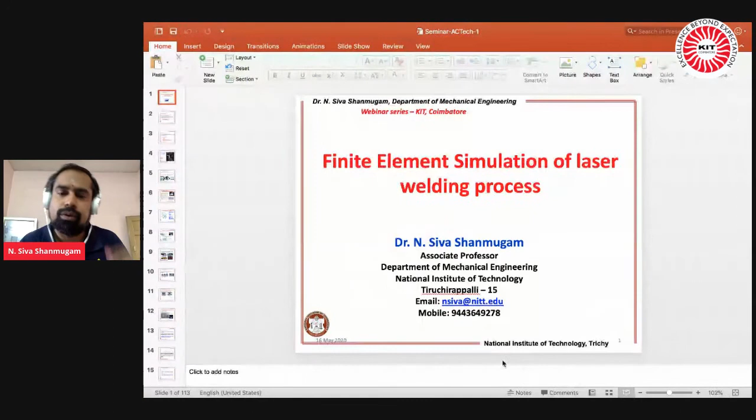So my today's topic is on finite element simulation of laser welding process. The finite element method is a numerical tool or numerical technique where you can apply this technique to any field. It is not only for welding; you can use this finite element tool for any manufacturing process or any physical problem.

So the idea behind that is, if you want to understand a problem and do a number of trials, since experimental methods are very costly, in order to reduce the experimental work and get more insight about the problem, the only way is to simulate the problem and understand the phenomenon. Understanding the phenomenon means you have to know something about the problem by searching in books or in open sources.

Once you understand the problem and the behavior of the system, you can use numerical techniques like the finite element method, finite difference method, finite volume method, or boundary element method. You can adapt these numerical techniques to simulate the problem.

Why, sir? What is the need of simulation, sir? When you want to launch a vehicle, for example if you are working on aerospace and want to launch a rocket, doing all the experimental work, fabrications, and then the launch—if something happens to the system, the entire mission collapses. To avoid that, they go for numerous trials, doing simulation using CFD packages or finite element packages, and find out whether the developed model is working under the correct conditions. Once you understand that, then you can go for an experimental methodology.

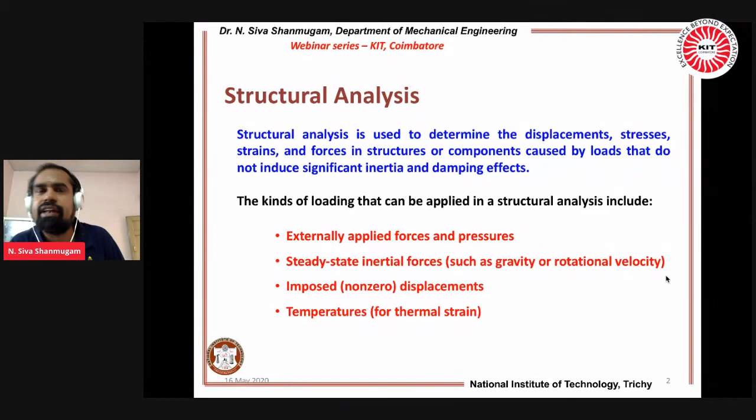Sir, I want to impose the temperature—it is not at room temperature, it is at an elevated condition. Then instead of 30 degrees centigrade or 35 degrees centigrade, you have to impose the temperature prevailing in that condition. For example, if I am working in cryogenic conditions, then it is about minus 250 degrees centigrade or minus 50 degrees centigrade, related to the structural part.

So these are all the 4 different loads where most of the structural analyzers are utilizing for that problem.

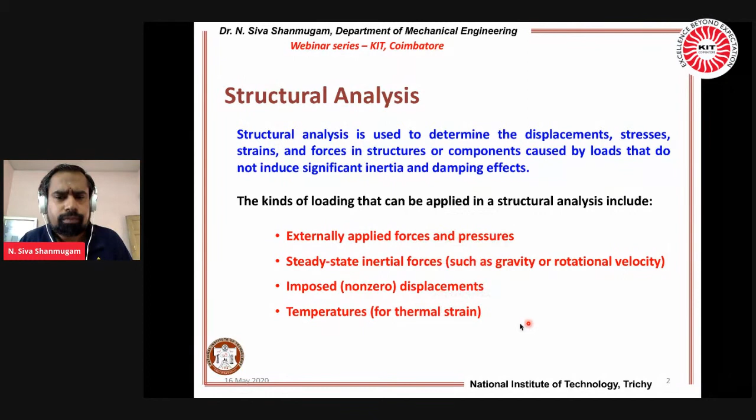Okay, so now we are going to the next part—the thermal analysis, because it depends upon the problem that you are going to simulate. Sir, in FEA, when you go for thermal analysis, the finite element analysis is capable of both steady state and transient analysis. It may be a time-dependent problem, or it may be independent of time.

Transient analysis of any solid with thermal boundary conditions—because I am going to heat the body, and there are boundary conditions where the heat is propagating inside the material by means of conduction. There is heat transfer, convective heat transfer, or it may lead to a radiation effect. These are all things you have to incorporate into your model, both in steady state or transient, according to the problem you have selected for your research.

That's why I repeat once again, before doing the simulation, my dear friends, please understand the physics of the problem.

Steady state thermal analysis calculates the effect of steady thermal loads on a system or a component. So you can take it as an entire system, or you take only a part of the system and do the analysis. Such loads include the following.

It may be convective heat transfer, convection, radiation, or it may be heat flow, or it may be heat flux. You know, heat flux is heat flow per unit area—it is in joules, or it may be in terms of watt per mm square or watt per meter square. Heat flux pertains only to the surface area.

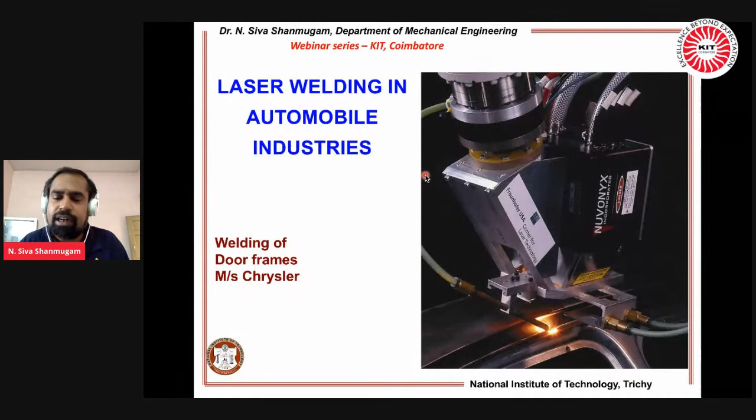Shielding gases: there is a variety of shielding gases used in welding processes, especially for laser welding. We utilize helium or argon, or a combination of helium plus argon. These are called inert gases, of 100% purity - industrial pure argon or industrial pure helium.

Helium gas is quite expensive, so for most of our welding trials we have utilized argon because it is less expensive compared to helium. A combination of 50% helium and 50% argon can also be utilized to optimize the output parameters.

What is the output parameter? Once after completing the welding, if you cut the weld and do the metallography examination like polishing and etching, you can see the weld bead geometry. Weld bead geometry is the output parameter, the desirable quality which will judge the quality of the weld. That's why I used the word 'required weld profile'.

Weld profile means weld bead geometry. Let me draw that weld bead geometry. A small example using a pen: for instance, this is a plate with a square butt joint. This is the joint, so if you want to see the weld geometry, this is that weld.

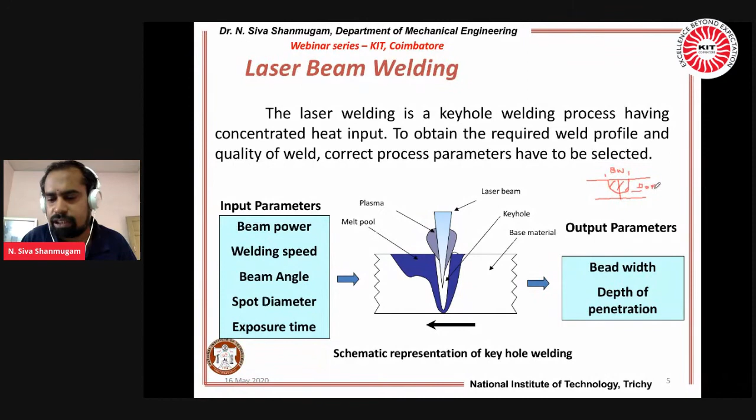So these are all the things I have discussed for the last 15 to 20 minutes. Now another thing - because each and every slide will give a different research area, my dear friends, please be focused on my presentation.

So what do you mean by the Tailor welded blank? This is very, very popular nowadays in all manufacturing sectors. Why is it called Tailor welded blank? What is the duty of a tailor? He is going to join 2 different colored cloths with the help of a sewing machine.

See, it is tailor made. What is your need? What is your need? You can do it - sir, I want to join Inconel with stainless steel. Do it, that is a possibility. That is called Tailor welded blanks.

According to our use, you are joining 2 dissimilar materials - that is also called Tailor welded blank. Or 2 dissimilar thicknesses. Sir, if you take a car, if you take the monocoque of the entire car, it is not having a uniform thickness. See, I am joining a 3 mm thick sheet with a 1.5 mm thick sheet.

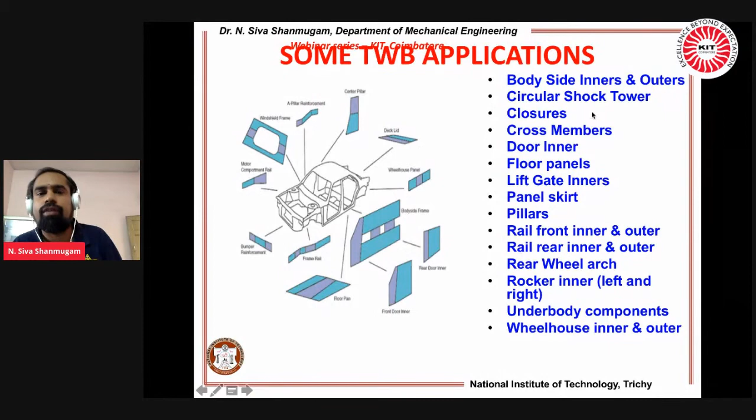So everything is listed here — what are the areas where they go for tailor welded blanks? These are all common day-to-day applications. They mostly use tailor welding, that is, laser hybrid welding.

So far what I covered is tailor welded blanks. Now I am going to introduce the hybrid process. What do you mean by hybrid? You are adding two technologies under one umbrella to get the advantages of both processes. What do you mean by laser hybrid? I am going to connect

the GMAW process with laser. What do you mean by GMAW? As a mechanical engineer, in your first semester you would have studied basic mechanical engineering, where you learned about gas metal arc welding. It is also called MIG — metal inert gas welding. They use a consumable filler wire to deposit it on the substrate material, on the joint where needed.

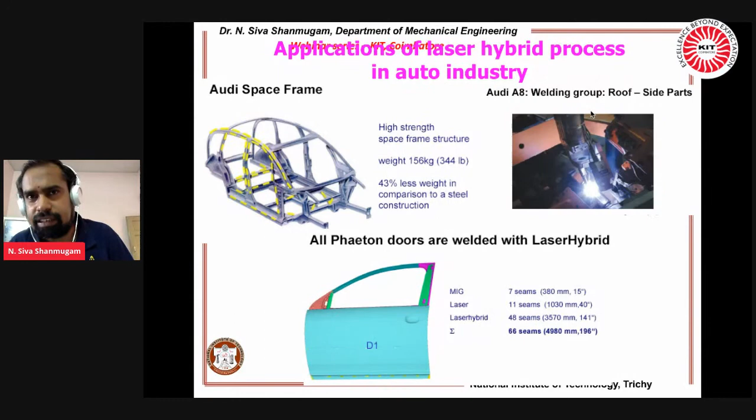Sir, what is the advantage of GMAW? What is the advantage of the laser? Why are you adding the laser in the hybrid process?

So many things are there. Without laser, it is inevitable to develop a monocoque structure of any car frames. So this is the typical picture which will give an insight related to laser hybrid welding. Before getting into the schematic, I want to share very important information pertaining to laser.

The parameters related to the laser: beam power is the energy, and welding speed is how fast you are moving the welding head, that is the laser head.

Now, about the spot diameter, because we are playing with light energy. When you are doing a classroom lecture or a PowerPoint presentation, you use a laser pointer. Here itself I'll show, there is a laser pointer here.

If you take a laser pointer, this red color available in my presentation is the laser pointer. You see the size of the pointer is something around 2 mm, or 3 mm. I think everyone can understand. As I move the laser pointer in my PPT, the approximate diameter of the red color you are seeing is about 3 mm, or it may be 4 mm.

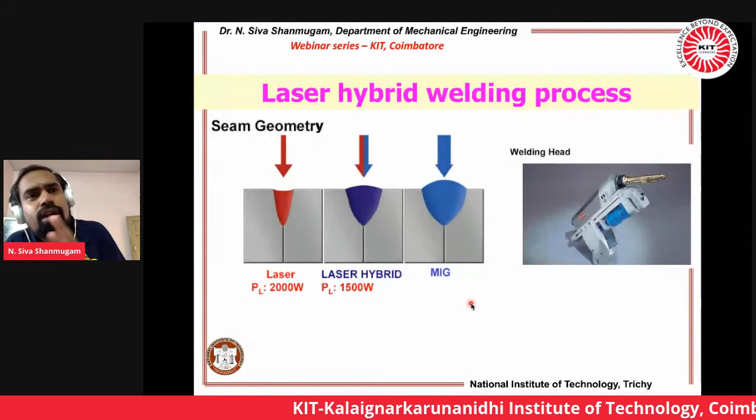Sir, what about when you compare the energy you are acquiring from the laser with the conventional arc? Oh, very good question, I want to answer that. How do we compare it with conventional arc welding? What do you mean by conventional? This MIG that I showcased here, MIG welding.

What is MIG welding? It is metal inert gas welding. What do you mean by metal inert gas? You are using a consumable filler wire. What is the diameter of the filler wire? Sir, my filler wire diameter is 1.6 mm.

So how do we get the arc out? When you touch the filler wire - or otherwise, leave the MIG and go with normal stick welding. On the roadside you can see a torch with the electrode; the electrode diameter is something around 10 mm. For example, take the diameter of the electrode in roadside welding, where they do some joints.

When you want to create grills, if you go to a grill shop, the welder will take stick welding in hand. They do that welding for making grills, door panels, sheds, etc. The welder carries this handheld electrode machine, the stick welding machine, to create those panels. The electrode they place is around 10 mm, and the arc established is at a diameter of 10 mm.

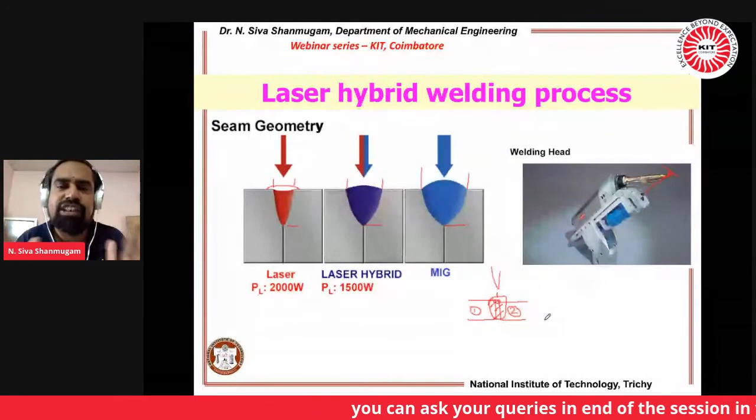So this is the beauty of it. You see, with the laser, even though the gap is very high, something around 1 mm, with the help of the laser hybrid technique the parameter is indicated here. Welding speed is maintained at around 2.4 meters per minute—for 60 seconds, it moved around 2400 mm. With the same welding speed, using only the laser, you are not getting the gap bridgeability.

You see, there is a lack of fusion, and this imperfection is called undercut. Undercut leads to, when you are applying a load over here, you get the fracture at this location. Undercut leads to weld imperfection. Clear?

So with these two things, I think I have enriched your knowledge in laser hybrid as well as the laser beam welding process.

This is another typical example. Whatever may be the joint configuration—it could be like a fillet, an L joint, a T joint, or a lap fillet. I repeat, joint configurations like lap seam, lap fillet, T-joint, square butt joint. What I have drawn in the presentation is a square butt joint. We can do lap seam, lap fillet, T-joint, and whatever may be the position, you can keep that. You can orient the laser head and do the joint configurations. You can do overhead positions, 2G position, or 1G position—whatever may be the position, you can tune the laser according to your vision.

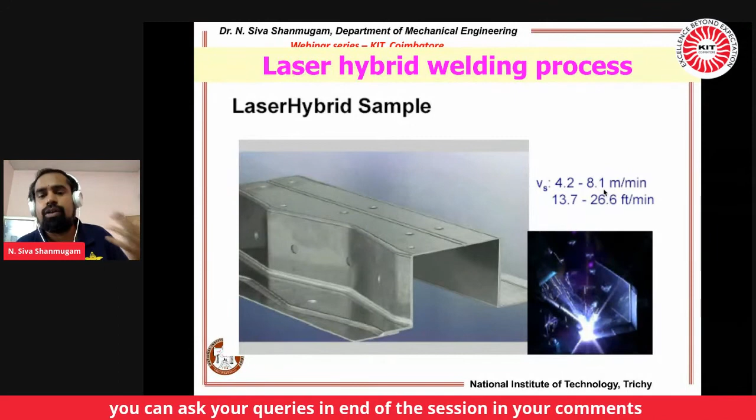This is about a welding speed of around 8.1—it is a very high speed, my dear friends. It is something around 8,000 mm per minute. In 60 seconds, you can move with a very high speed of 8,000 mm.

Okay sir, why do modeling? So far I have discussed with you the purpose of modeling. Modeling is the art of abstracting or representing a phenomena. That's why I asked you first: understand the phenomena before doing the modeling.

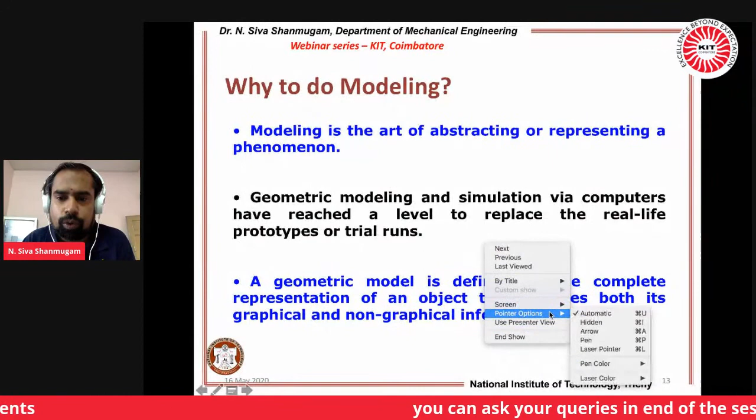Geometric modeling and simulation via computers—once again, I'll change it to laser pointer. With simulation via computers, I have reached a level to replace the real-life prototypes or trial runs. You can minimize the trial runs and simulate the system with the help of computers. A geometric model is defined as the complete representation of an object that includes both its graphical and non-graphical information. So you can plot something or unplot something and do the simulation.

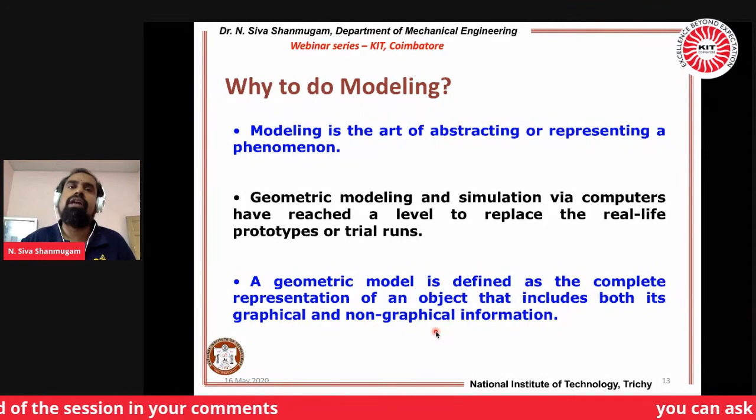So the only thing is you have to model the phenomena. For that you have to understand the phenomena, then do the geometric model, then simulate using the computers. Okay sir, then is modeling alone sufficient? Sir, how to cross-check, how to verify the model is correct or not? Then you have to do the actual experimental trials.

My dear friends, at this juncture I want to insist on a very important thing. When you are writing a research article, when you are doing the simulation, please don't report only the simulation part—you have to validate your results. Validation means you can validate the simulation results in three forms. First, you can validate the results analytically. Analytically means, if you have governing differential equations, you can apply the boundary conditions and find out the unknown parameter.

What is the unknown parameter here in case of welding? It is the bead width and depth of penetration. From the heat profile, from the temperature distribution profile, you can predict the approximate bead width and depth of penetration using analytical solutions—analytically you can play with the equation. Second, if you are not getting any analytical equation, then do the experimental work: do the actual experiment, do the laser welding, cut the specimen, metallographically prepare the specimen, etch it, polish it, and reveal the macro structure to get the bead width as well as the depth of penetration.

Or the third one, sir, analytically not possible, experimentally not possible. Then you have another technique, another method is to compare with previously published research articles. Don't take a normal paper, take an SCI indexed or Web of Science article, then compare your results with that published article. It is very, very important, friends.

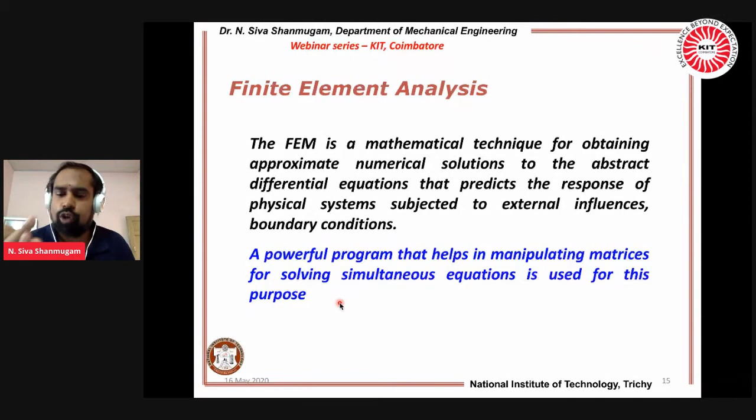When you go for this, sir, whatever package it may be, this is the step you are going to follow. Whatever the package - ANSYS, COMSOL, Abaqus, Nastran, Patran, NISA - whatever it may be, this is the procedure. The first 5 steps are called pre-processing. The 6th step is called the solution phase, and the 7th step is called post-processing.

First 5 steps are called pre-processing. If we go to the ANSYS window, you can see on the left-hand side pre-processing, solution, and post-processing. The first 5 steps are pre-processing, the 6th step is the solution phase, and the 7th step is post-processing.

What is pre-processing? You are assigning the element - what type of element you have to select to do the analysis - and how you are applying the material properties, everything happens in the pre-processor. Applying the loading conditions, boundary conditions, everything is related to the pre-processor.

What do you mean by the solution phase? You are going to solve the current load step - that comes under the solution phase. What is the 7th step?

You are reviewing the results. Sir, I want to find out the temperature distribution, the von Mises stress distribution, the principal stresses, and the displacement or deformation, etc.

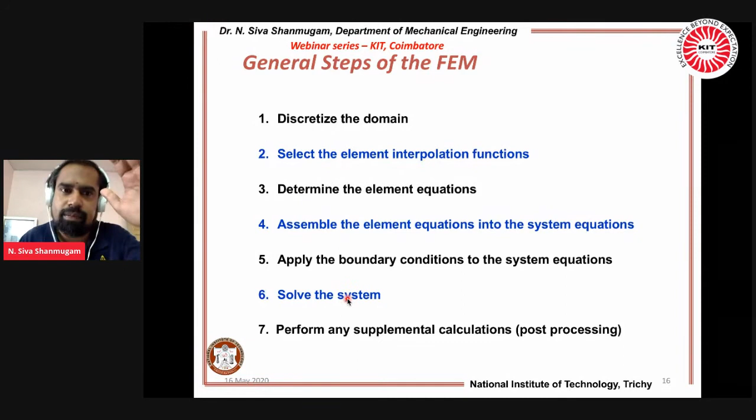That is coming under the post-processing. This is something about the general steps followed in the finite element method.

Okay sir, why FEM for this welding problem? So this slide gives basic information on why we are applying the finite element method, or a numerical simulation tool, to simulate the laser welding process or a welding process.

Heat developed during the welding process occurs because the light energy coming out from the laser head impinges on the substrate. That energy, the light energy, is converted into heat energy.

The heat developed during the welding process intermittently interacts with the workpiece over a very short time interval. You can see 8,000 mm per minute. If you want to do a weld of around 1 meter, the welding speed followed is something around 8 meters per minute. So within a fraction of seconds you are crossing the 1 meter length. In each time interval, one end part is heating while behind it the part is cooling - heating, cooling, heating, cooling.

So if you want to really simulate the conditions and understand the basic physics behind the welding, then simulation is very, very important to understand what temperature is prevailing before the heat source and behind the heat source. I will show this when I am showcasing the results.

So going to the experimental part, I want to thank, at this juncture, the Welding Research Institute for providing me the experimental facility to conduct so many experimental trials at the laser welding facility.

This is the power source available at the Welding Research Institute. It is a 2 kilowatt Nd:YAG laser, a solid state laser - neodymium yttrium aluminum garnet laser welding system. There are 4 compartments, and each compartment is capable of producing 500 watts. This is the laser head.

As I already discussed with you, you can tilt the laser head to attain a different beam inclination. That is another very important piece of information which I will explain.

This is the entire computer numerical control setup. Because it is a radiation, it will create harmful effects to your eye, that's why the entire system is closed and the beam is invisible. You can only see the heat, the back reflection on the monitor - that small fire you can see is only the fusion area. And this is the cross wire, which is used for aligning the laser on the substrate.

Sir, for example, if I want to do a circular weld, this cross wire will be properly aligned on the circular section. This cross wire indicates that the laser is following the correct path, similar to what you maintain in a gun when you want to shoot something—there is a cross wire, same method we follow here. You also see a shielding arrangement, a cross jet of gas. This cross jet of air is used for cleaning the incoming laser, because it is only light energy where you have dust particles.

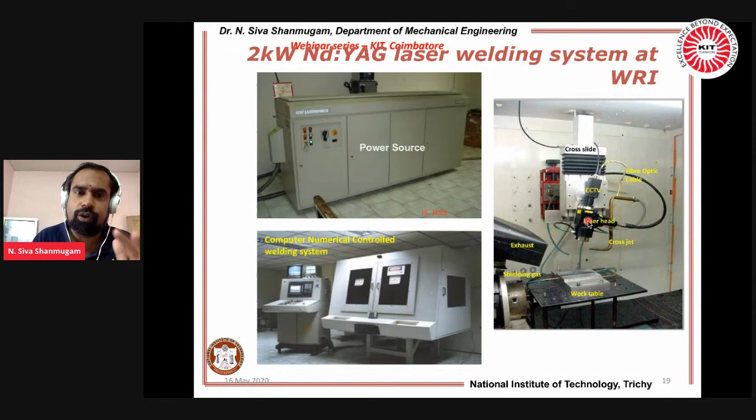So this is the arrangement available at the Welding Research Institute for doing the experimental trials, and this is the beauty of it. When you are playing with light energy, you have to ensure that all the energy is distributed in the circle, in the spot diameter. Correct, sir? So as already discussed, whatever beam power you set in the system should be properly focused in the spot diameter.

You see there is a small graph. What it indicates is like a Gaussian profile. This means the entire energy is distributed inside the spot diameter like a Gaussian distribution. It is called TEM00 mode, transverse electromagnetic mode. It is nothing but the intensity distribution measured over the beam cross section. I repeat, TEM00 mode—what do you mean by TEM00 now?

The entire energy is focused inside the spot diameter. What do you mean by transverse electromagnetic mode? It is judged, it is measured in such a way that shows how the heat intensity is distributed over the beam cross section. When the beam comes out from the laser, if you cut the beam, you can see how the heat is distributed—that gives an idea of TEM00. Sir, do we have any other TEM?

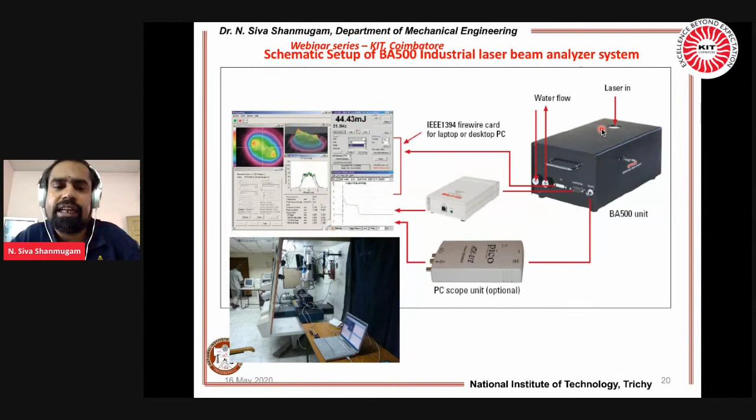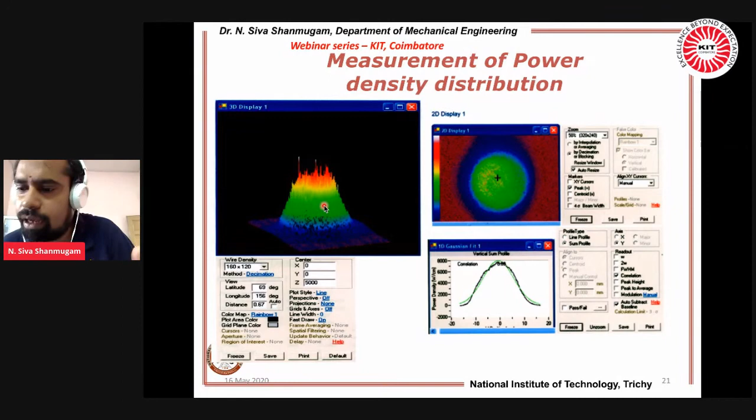Okay sir, this is the way the heat is distributed. So now the laser is ready for doing the trials. This is before doing the welding—you have to tune the laser in such a way that we are obtaining TEM00 mode to ensure we are doing the experiment correctly, using that beam density information.

It is something around less than 0.1%.

When you go for a laser beam welding simulation, so far you have understood laser beam welding, laser hybrid welding, why finite element method, what are the input parameters, what is the output, what is the desirability level - everything we have discussed. When you go for doing the simulation, it is a computer program. I am using ANSYS Parametric Design Language, APDL. Please make a note of it. APDL is utilized for simulating the entire process of the welding.

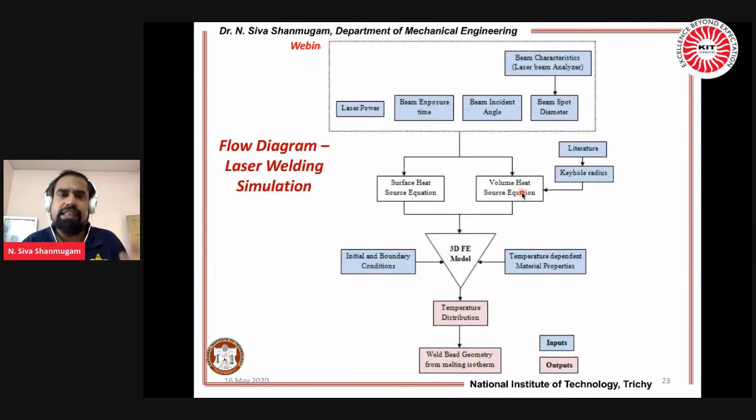So this is the sequence I have followed. The same thing is shown in flowchart form, where I use temperature dependent properties like conductivity, density, enthalpy. Why enthalpy? Because I am considering the phase transformation - solid converting to liquid. Upon transformation and upon solidification, you are getting liquid from solid, and solid from liquid.

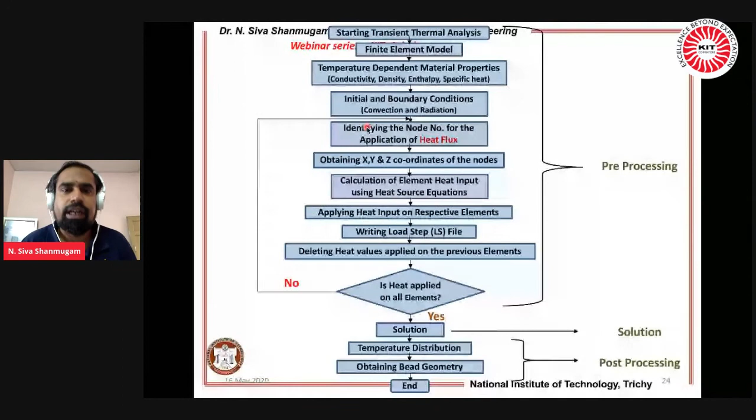So with initial boundary conditions, applying the heat flux, giving the heat source equations, applying the load step, you develop and solve the problem, and find out the temperature distribution. This is a normal mathematical description of the problem - it is the heat conduction equation.

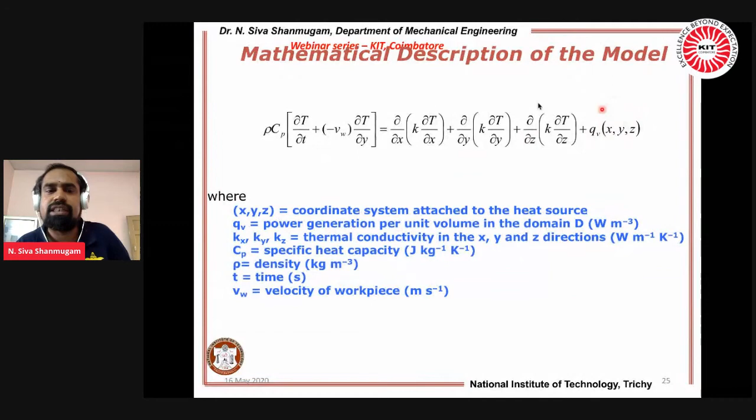qv represents the heat source model. What I consider for this is the power generation per unit volume. So the power I am going to give is specified in terms of these equations, and it translates into heat energy on the substrate material.

I have discussed so many things. What are the different heat source models available? Apart from the three I mentioned, there are so many heat source models available - modified Gaussians are available. In plasma arc welding, they use different sources. So based on the weld bead geometry, the physics of the welding, and the resulting bead, researchers write their own volumetric heat source.

But for my problem, we have utilized only the three-dimensional conical heat source. This is a schematic representation of the conical Gaussian heat source, which I'll show in the forthcoming slide. This is the predominant one, called the Goldak heat source model. This is called double ellipsoidal. For conventional arc welding like MIG, TIG, stick welding, they use this double ellipsoidal heat source for doing the simulation. What do I mean by Gaussian, which I already discussed?

I have used the industrial beam analyzer to get the Gaussian distribution - how the heat is distributed on the top surface. So the conical Gaussian is the addition of Gaussian at the top and conical at the bottom. This is the beautiful representation of a conical Gaussian - the top is the Gaussian representation. For example, if you take a sheet metal, on the top surface, when the laser is impinging and touches the surface, the distribution of heat on the top surface is Gaussian.

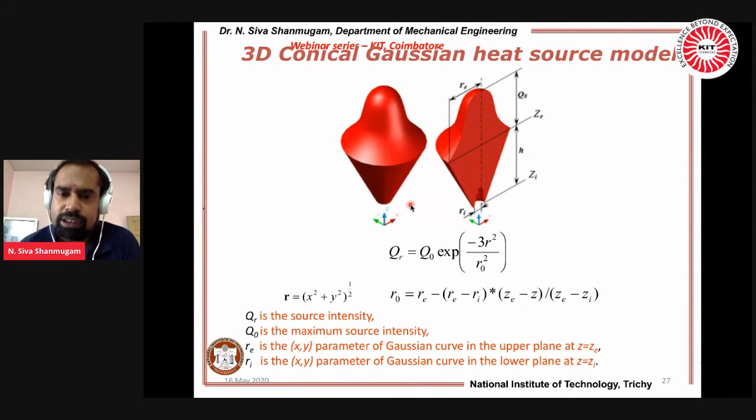I repeat once again, this 3D conical Gaussian comprises two parts. It is divided into two: the first is the surface, the second is the volume. It is a surface because it is taken only along the x and y axes.

At Z equals 0, this is the top surface. Z equals minus h is the bottom. If we take h as the thickness of the material, Z equals 0 at the top surface, and Z equals H at the bottom portion of the material. So we have two surfaces when you take a sheet metal, the top and the bottom surface. Top surface we consider Z equals 0 and bottom surface Z equals H, where H is the thickness of the material.

With these equations, I am feeding this equation into my finite element code in order to simulate the volumetric heat source. What do you mean by the volumetric heat source? What is the behavior of laser welding, and how are we getting that behavior? Once I get the weld bead geometry, based on the shape of the weld bead geometry, I select the heat source. Sir, if it is for conventional arc welding with shallow penetration, then the 3D conical Gaussian heat source is not required.

In that case, you go for the Goldak double ellipsoidal heat source. Sir, when you go for friction welding, these heat sources are not possible to use for simulation. You can go for frictional heat instead. From the frictional heat you have to do the simulation for analyzing friction welding processes. So this is something about the surface heat source and something about the volumetric one, with each terminology given here.

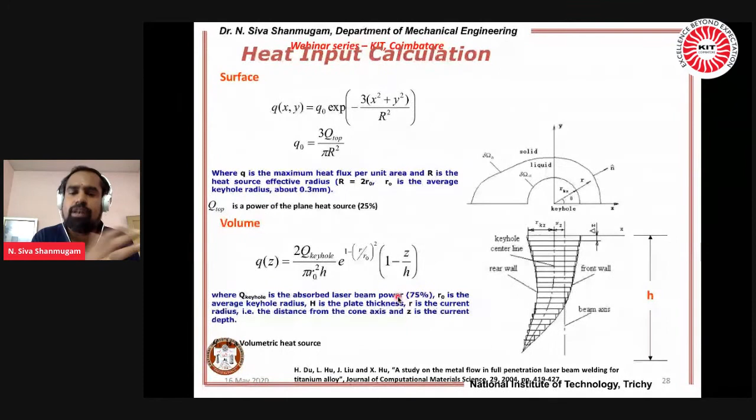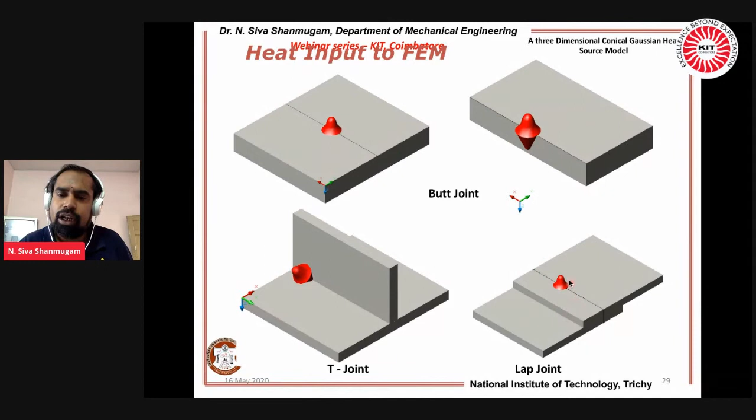This is the way I want to tilt the laser beam and impinge it on the weld trajectory. When you go for a lap joint, it is called lap seam, similar to the butt joint. You are impinging the laser on the substrate above the sheet. If you place one sheet over the other, it is called a lap joint, and you impinge the laser on the top surface of the top sheet.

So now, based on the boundary conditions, what are the boundary conditions? It is an entry. The initial conditions are at time t equal to 0. At time t equal to 0, temperature should be at room conditions, where T0 is the room temperature.

So during the entry, it is at the initial condition. The entire substrate material should be at room temperature, where T0 implies the room temperature.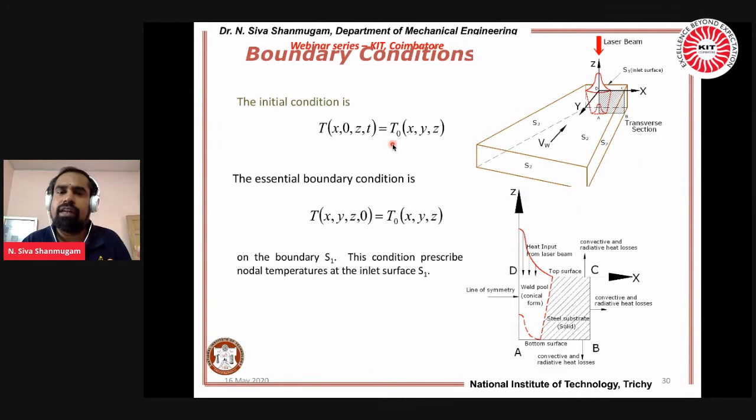Okay, so what about the natural boundary conditions? Because I am talking about laser irradiation, and radiation means energy will be dissipated. Laser irradiation means it's absorbed. Laser radiation means energy is wasted in terms of radiative heat transfer, but laser irradiation means it is absorbed by the substrate material. So according to the natural boundary conditions, I have considered three modes of heat transfer: conduction, convection, and radiation effect.

Okay, so this is the thing. When I discussed the beam incident angle, this is the point I want to highlight here. If you keep the laser head straight, because we are playing with the optics, we are orienting the laser by changing the optics, since it is only a movement of light energy. By fiber optic cable, you are transporting the laser from one portion to another point, and with the help of the optics, you are impinging the laser to the spot diameter of the beam.

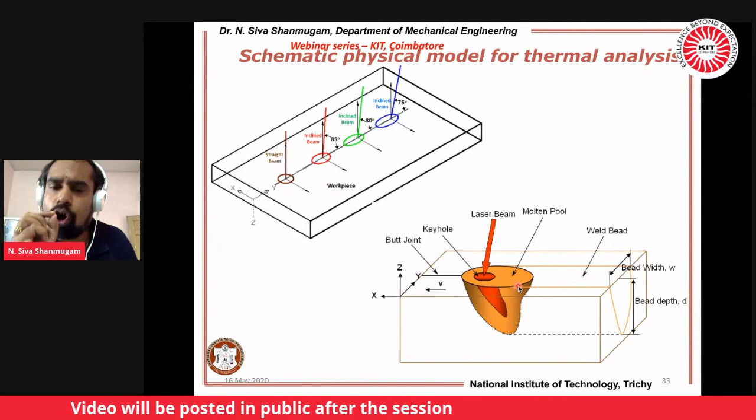So your keyhole will not be visible to your eye. But during the simulation, during the condition of welding, you can see the keyhole using a high-speed camera. The cut section is not possible, but when you focus on the top surface, you can see a very small pinhole, which I'll show when I present the real picture of the weld.

This is the finite element model. As far as the condition for the finite element model is concerned, wherever your concentration is very high, wherever you are doing the simulations, you can see the temperature distribution here. The temperature gradient is very high at the weld trajectory. As you move further, the temperature gradient is not as high. So that area gets a coarse mesh, while the weld trajectory is meshed with fine elements - fine mesh at the weld trajectory, coarse mesh far from it. The total nodes and elements are depicted in this picture.

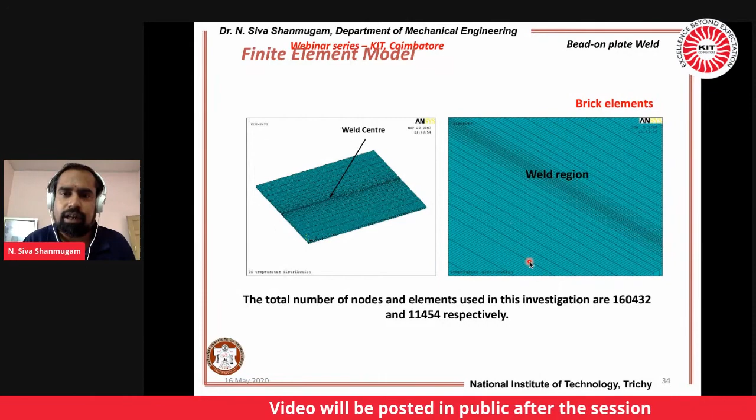So what about the assumptions? Without assumptions, it is not possible to do the simulation. I am doing only the thermal part, not the fluid flow part, because fluid flow requires considering the convective flow, Marangoni convection. Please write down the term Marangoni convection.

It is called the Marangoni effect, sir. It is a beautiful thing. Because I am running out of time, I already crossed my given time, so there is so much information I could give about the Marangoni effect, sir.

When you do simulation in CFD, you have to consider all those effects, but I am doing only the thermal analysis. In thermal analysis, there is no need to consider physical phenomena like viscous force, buoyancy force, convective melt flow, Marangoni effects, etc. By considering this, I already discussed that the absorptivity of the material is only 69.3%.

As proposed by Xie and Kar in 1999, the laser absorptivity for stainless steel is only 69.3%. So if you are operating with 1000 watt beam power, only 69.3% of that 1000 watts will get into the material, not 100%.

The lumped heat transfer coefficient I considered for this analysis was proposed by Frewin and Scott - you have to acknowledge and cite references when using something in a research article. Convection and radiation loads are considered. By considering the phase change, I derived the enthalpy of the material, and conductivity, specific heat, density are all temperature-dependent properties.

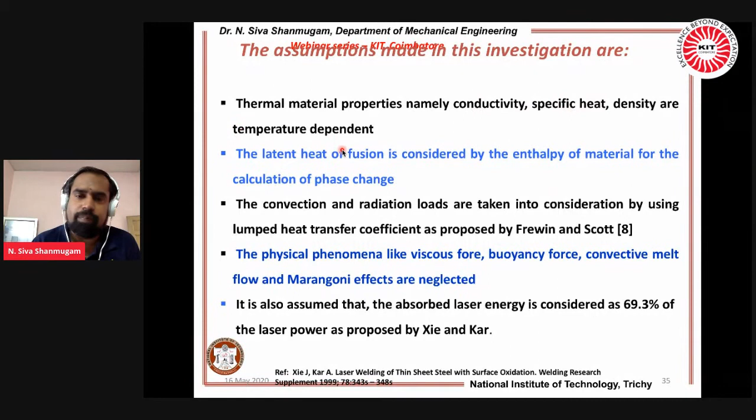So with the laser spot diameter, there is no movement of the laser now - the laser head is kept stationary. I am going to do only the spot welding.

Why am I going for spot welding? First, I want to understand the behavior of the spot welding, then go with the laser seam welding.

Laser seam welding means moving the laser torch, given a welding speed. You start with the welding speed. It will move with very high speed, 800 mm per minute or 8000, whatever the capability of the machine allows you to move the torch.

So what are the parameters? What are the input parameters? Now I can do the optimization to find out for which parameter set I am getting a very high depth of penetration, by doing the combinations and all.

You see, with different spot diameters, you can see the hole, the pinhole at the top surface. This is because of the keyhole. After removal of the heat source, the molten pool will close the entire keyhole but leave the impression at the top surface - that is why it's called the keyhole technique.

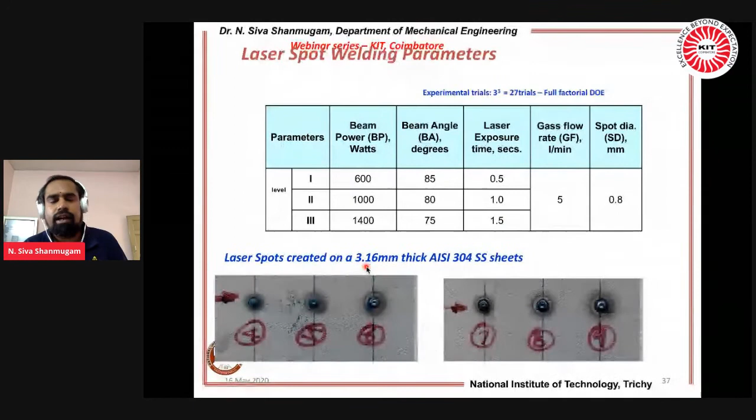This is exposed with different exposure times: 0.5 seconds, 1 second, 1.5 seconds. These are all made on SS304 material, with thickness of 3.16 mm. With 27 trials total, you can understand the phenomenon behind laser welding.

I already told you, if it is a straight beam, you get a circle, almost. But we operated around an 85-degree beam angle, so you're not getting a circle, only an elliptical profile. For a wider beam angle, you don't get a circle, it's almost elliptical.

So it's fully elliptical. For very high exposure time and very high beam power of 1400 watts, and beam angle of 75 degrees, you get a very high elliptical shape on the top surface. Like that, it is on the top surface.

You can do the simulation for creating a spot. The first spot is opened at an exposure of 0.5 second, and you move the torch to another location for creating another spot. I repeat, one spot is created at an exposure time of 0.5 second. The laser head is moved to another location because you want to continuously create spots as shown in the picture: spot number 1, spot number 2, spot number 3.

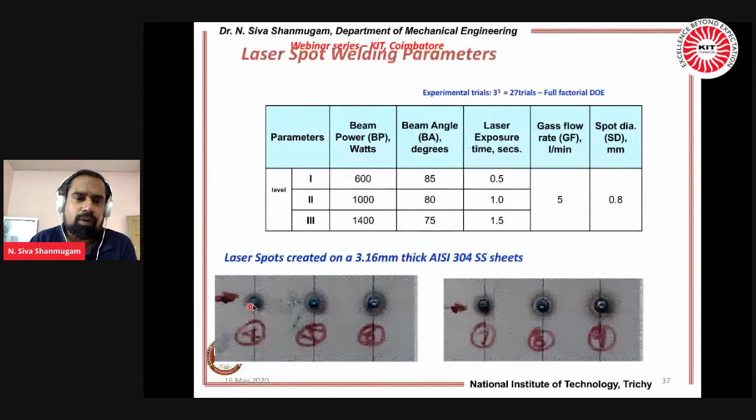You can really simulate the situation using ANSYS APDL, that is ANSYS Parametric Design Language. If you want more information, go to YouTube and type ANSYS Parametric Design Language welding simulation. You can acquire more information on APDL.

See, this is the scenario: one spot is created, the laser is moved to another location, another spot is created. One spot is in solidification state, one spot is cooling down, another spot is heating up. You see, two scenarios you can see simultaneously.

That is possible only with simulation, it's not possible with the analytical part. You can see this is in the cooling stage, this is in the heating stage. Almost it is end of the cooling stage, and this is in the heating stage. This is spot number 1 and this is spot number 2.

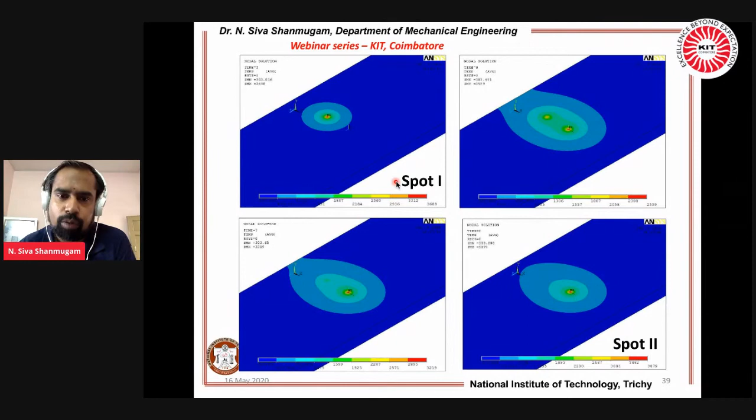So I can do the simulation. You can see at one junction, at one time, one spot is cooling down, another part is heating up. This information you can extract in the post processor.

You can see the temperature is something around 2559 Kelvin. So minus 273, that will give the approximate temperature distribution, and you cross the melting point of SS, because melting point is something around 1450, 1400 - if you add 273, it's something around 1573 Kelvin. But the temperature I have predicted, what I have simulated, is something around 2000. It crossed the melting temperature.

So when it crosses above that temperature, the areas encompassed by the melting profile will give the approximate weld bead geometry. This scenario you can easily simulate - you can see one spot cooling down, another heating up. At that moment, there is a point, there is a time where you can see a beautiful scenario between spot 1 and spot 2.

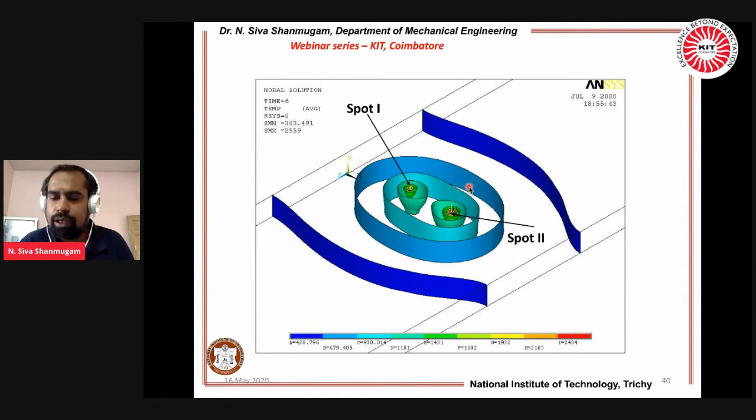Clear? So these are all the things - the temperature distribution by utilizing different heat sources. And when I used only the Gaussian distribution, my dear friends, when I gave the profile of the Gaussian distribution, it will give only the top surface distribution. It will not penetrate anything.

It will not showcase anything with respect to the thickness of the material available here. To check the capability of the code that I have written using APDL, I ensured that I fed both heat source models to find out the temperature profile. Only with the Gaussian you get a temperature distribution on the top surface, but using the three-dimensional conical Gaussian volumetric heat source, I can get the temperature distribution on the top surface and also in the thickness direction.

You can see a very conical type of distribution in the thickness direction. When you see it in the front view, you can easily understand the thing. So this is that picture. Wait, once again I will change it.

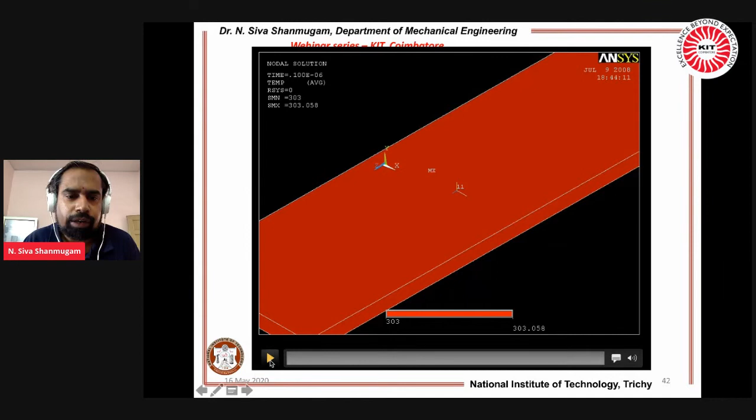When you do the simulations, you can take the animation video and all those things. First a spot is created here, and the laser head moves to another location. It moves to another location, and another spot is created. This part is going to cool down, and this part is going to heat up.

One spot is in the heating stage, while another part is in a different state, the solidification part. Through these simulations you get the peak temperature, which occurs just before the closure of the laser, where you achieve a very high peak temperature. After reaching the peak temperature, the temperature declines and attains room temperature during the cooling stage. All this you can do in post processing.

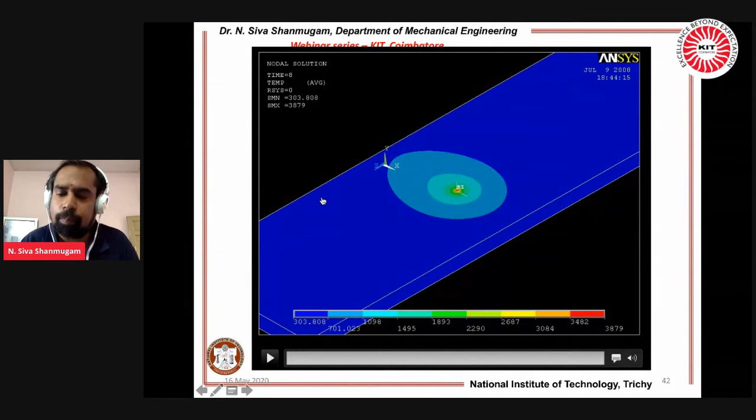So this is once again me replaying the video. You can extract this data because you can couple it with Excel or MATLAB, and plot how the temperature is distributed for a single spot, since we are doing only matrix manipulation. This is the geometry of the sheet.

The sheet geometry is something around 50 mm length and 100 mm width, a rectangular sheet. You can feed this information into your MATLAB code and find out the peak temperature at every moment. To understand the basics, look at this experimental weld profile.

During this experiment, I damaged the lens. The cost of the lens was around 12,000 rupees, and I spent from my own pocket to procure two lenses. That is why the cost is very memorable to me.

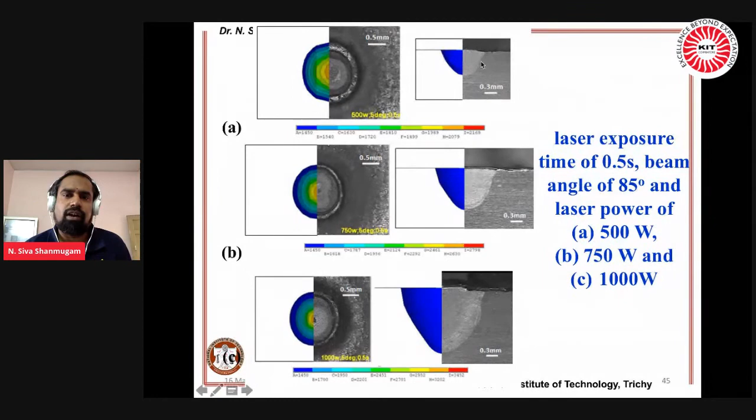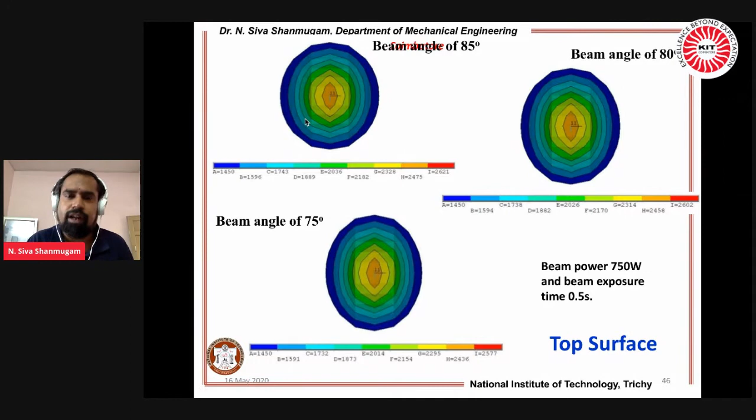These are all different surfaces, and you can see the parameter effect. When you go with a wider beam angle, you get almost an elliptical shape; this one is almost a circle. You can review these results and fine-tune your input process parameters to achieve the desired results. This is along the cross-section, showing the depth of penetration and the bead width, and you can develop a beautiful graph for publishing the results.

So far what we discussed is on stainless steel, which we made using ANSYS. This is the user manual, and this is a tutorial available in COMSOL. I want to acknowledge them here, because with their help I am presenting this to this forum, this webinar.

So this is a glass slab. This glass slab has a tendency of absorbing the laser beam, and this is glass.

The laser is used for melting the glass to weld the glass particles, to weld the glass material.

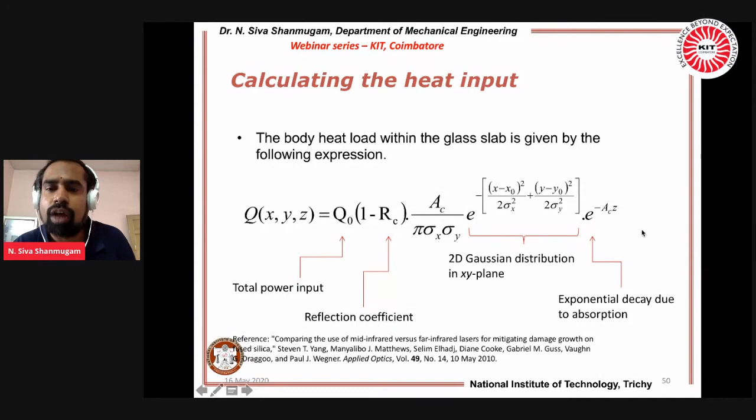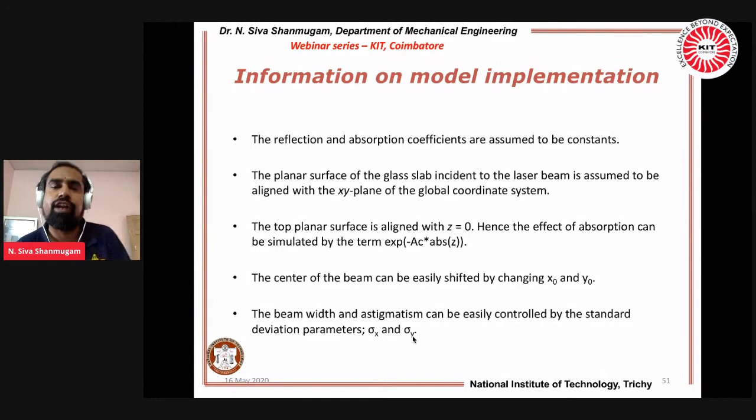See, these are all the equations they have used, including the reflection coefficients we discussed, which is 69.3. This reflection coefficient is associated with the RC, and this is the absorbability of the material. Sigma x and sigma y are related to the beam width and astigmatism. If there is any change in the optics, that deviation can be reflected in the equations through sigma x and sigma y. So there are some small changes if the beam density is not properly aligned. That correlation, that small effect, you can feed into the equation to find out the correct heat input going into the glass slab.

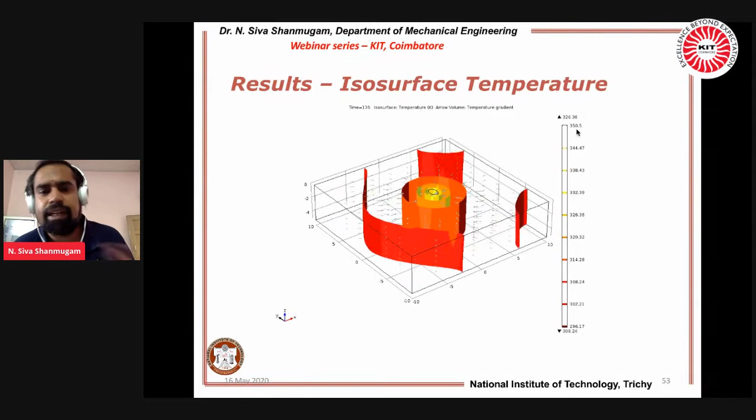So these are all the models. This is the area where the heat source, the laser beam, is going to impinge. This is the finite element model, and this is the physical representation of the system. After meshing, you get the finite element model and can see the temperature distribution. This is only the glass slab, and you are getting only around 350 Kelvin. Depending on the material, your temperature gradient will vary, and the peak temperature will also vary depending on the melting point of the material.

After understanding the basic science behind spot welding on glass, I used the welding speed. I adapted the welding speed to move the laser head and find out the temperature distribution when the laser beam is in the moving stage. Now there is no exposure time, because in spot welding we go for exposure time, but in seam welding, instead of beam exposure time, we use a terminology called beam welding speed, that is WS.

Beam angle is of 85, 80, 75, and gas flow rate for removing the plasma plume, as well as protection of the weld puddle from atmospheric contamination. I am using a gas flow rate of 5 liters per minute. This will be moved with the help of copper tubes, and the spot diameter I maintain is about 0.8, which corresponds to around 160mm focal length.

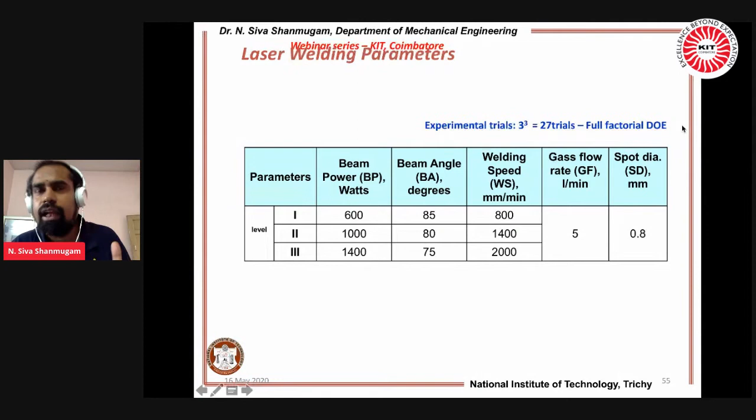So it is something like a full factorial design, because whenever you are doing experimental work, you have to go for a design of experiment technique. It is a full factorial design, and these are the trials I have made at the Welding Research Institute. This is the appearance of the bead on the top surface as well as on the root side.

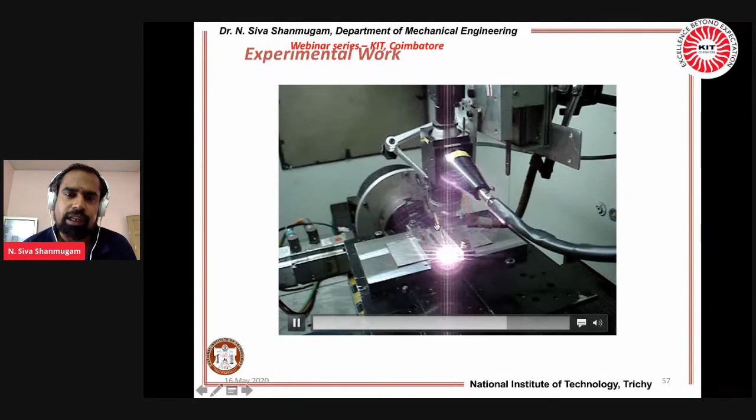That is the pin hole, and it was operated under the mode of TEM 00. When you go for cutting, you operate with TEM 01 and TEM 10. It is called TEM, transverse electromagnetic mode. What do you mean by transverse electromagnetic mode? It is an intensity distribution measured over the beam cross section - the power intensity distribution over a beam cross section.

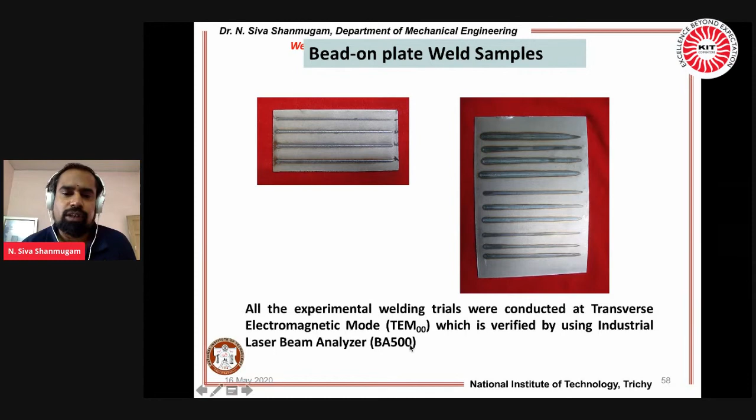And it was verified with the BA500 laser beam analyzer, and this was simulated with different load steps: at the initial period when the laser is at entry, when the laser is at the middle point, and when the laser is at the end. What is the temperature distribution on the surface and along the thickness direction?

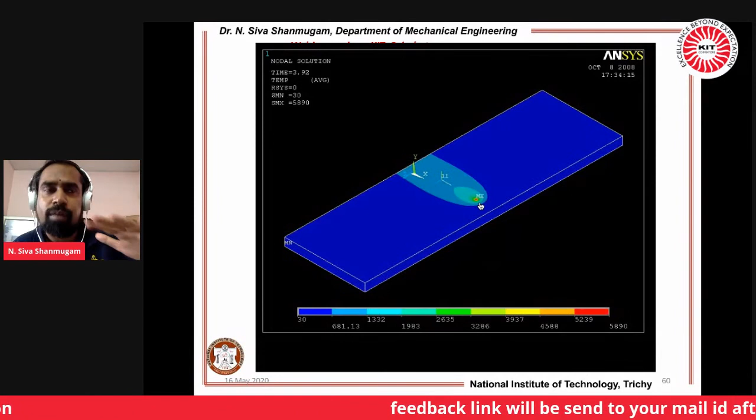When you simulate the conventional arc welding process, you are not getting this preheating zone. Preheating zone is very high, but it is a concentrated heat source. Most of the energy is getting into the material instead of from the surface. Surface energy is very minimum compared to the energy getting into the material. The XY energy distribution on the top surface is minimum, compared to the very high energy distribution along the thickness direction. That's why the preheating zone is very minimum, and the post heating shows a very wide temperature region, something around 600 to 1332 Kelvin.

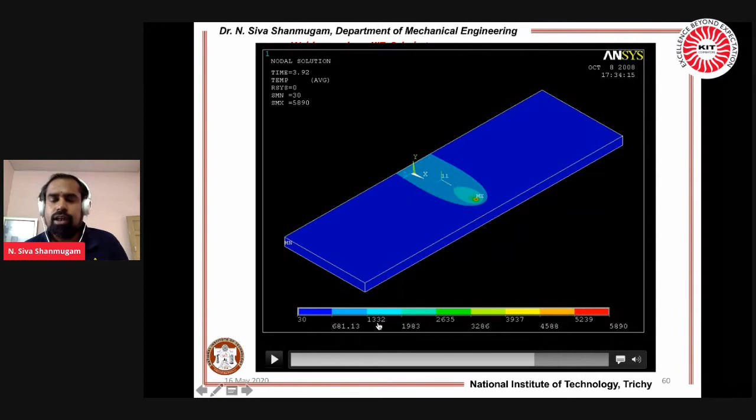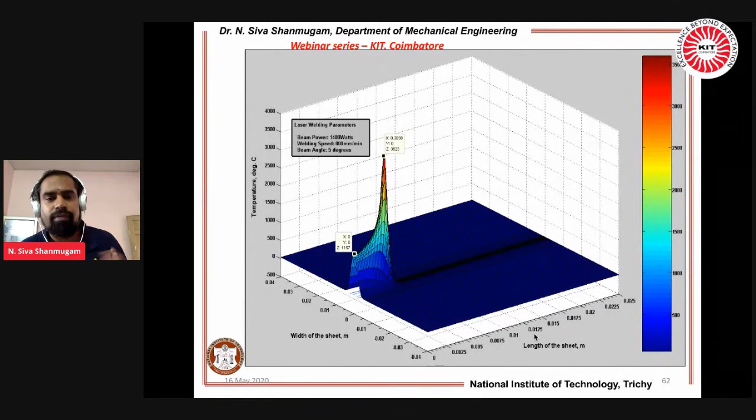So from that you can see the temperature distribution very easily, but experimentally it is not possible. That's why with FEM, because of intermittent interaction with the workpiece, you get alternate heating and cooling. That is why the beauty of finite element method plays a predominant role in getting the temperature distribution and all those things. With the help of MATLAB, coupled with Excel sheet or MATLAB, you can see how the temperature is distributed, and at each junction what is the peak temperature, what is the room temperature, everything you can see.

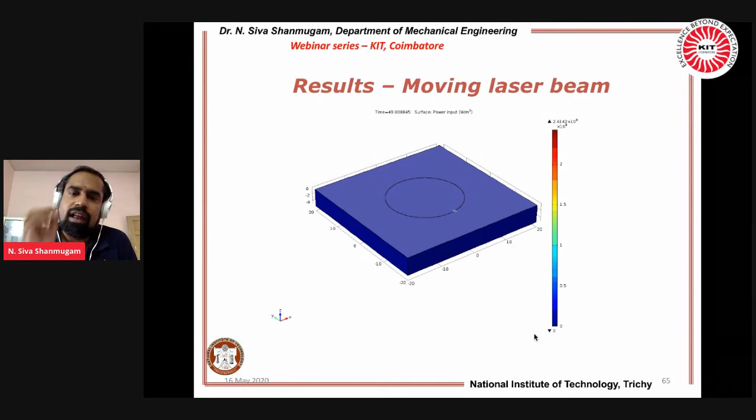So far I have discussed only the linear profile. When you go for the circular profile, with the cross wire you can fit the heat source at that point, and from that you can do the simulation. This is taken out from the COMSOL.

So we have an idea of how to work with this COMSOL. The capability of the COMSOL is that you can directly incorporate your own equation. Based on the behavior of the weld bead geometry, if you have written your own heat source model, is it possible to incorporate it? Yes, you can use the COMSOL. Tutorials are available in open sources. Put the temperature distribution profile, laser heating - if you put laser heating, you can get the code behind the COMSOL.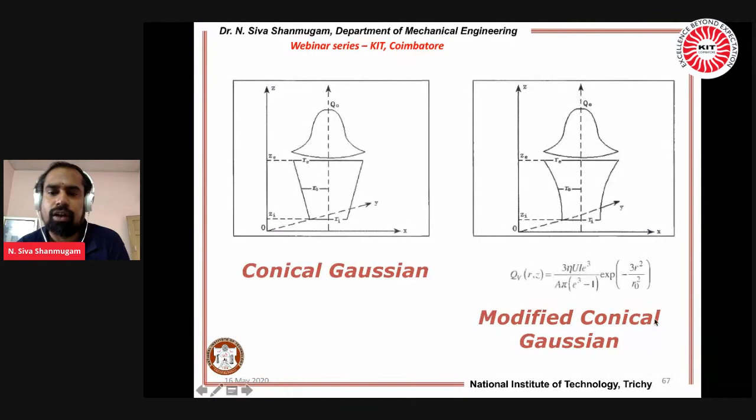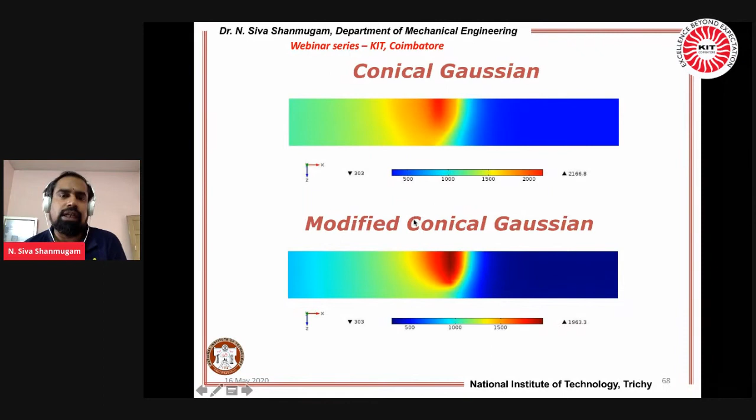This is another different one, a conical Gaussian that we have used for the simulation. If you change the profile, Gaussian changes to conical Gaussian, conical Gaussian changes to modified conical Gaussian. So if the weld profile is like this, is it possible to do the simulation? Yes, it is possible - you only have to change the equations and the boundary conditions. This is for conical Gaussian and this is for the modified conical Gaussian.

So I think this is a quick brush up of what we have discussed - about the preheating zone and the post-heating zone. With a very low welding speed, you see 400 mm per minute is very slow compared with 1200 mm per minute. You have a very big heating tail, so the preheating zone is very minimum and you have a very big heating tail.

What we have discussed here is the molten pool profile and all - this is plasma plus plume, this is the liquid part, and this is the solid. When you are impinging the laser, after removal, this entire liquid is converted to solid. Liquid will fill the vapor, and the keyhole will be filled with liquid. Upon solidification, liquid is converted to solid, and this profile during the movement of the heat source you can highlight and simulate. That is what I am highlighting here - with different welding speeds, how the heating tail looks when visualized from the top.

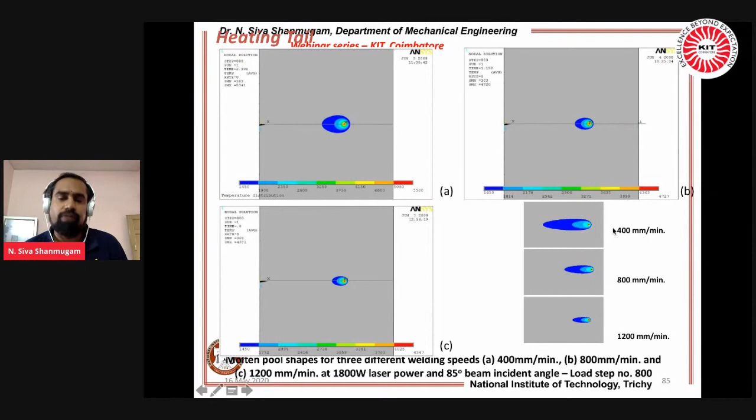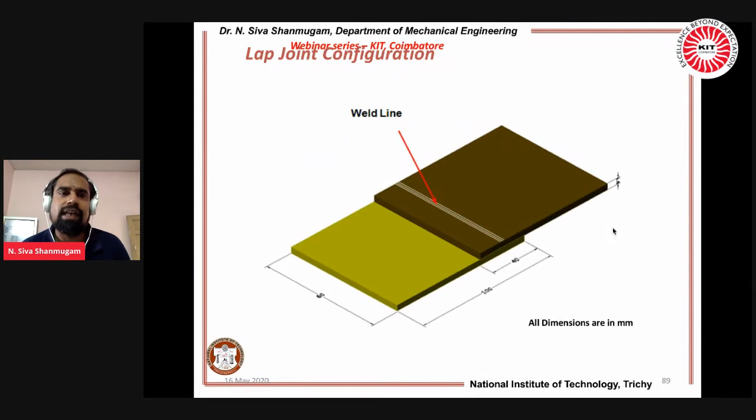This is for different joint configurations. I already told you, T-joint we have simulated, lap joint we have simulated - so many things are there, lap joint. This is the TEM00 mode, TEM10, TEM20, so many modes are available. This is for the lap joint, and we have made the simulations - this is the sheet placed one over the other.

What is the appropriate power required to penetrate the bottom sheet? You see, the first sheet, the top sheet, is penetrated and gets into the bottom. When you operate with this beam power and welding speed, you are not supposed to penetrate the bottom sheet. So these are all to cross check whether the beam power is adequate to achieve full penetration - this and all you can achieve.

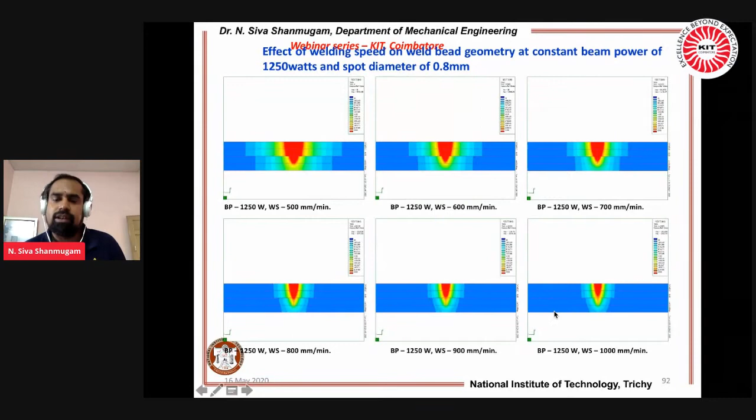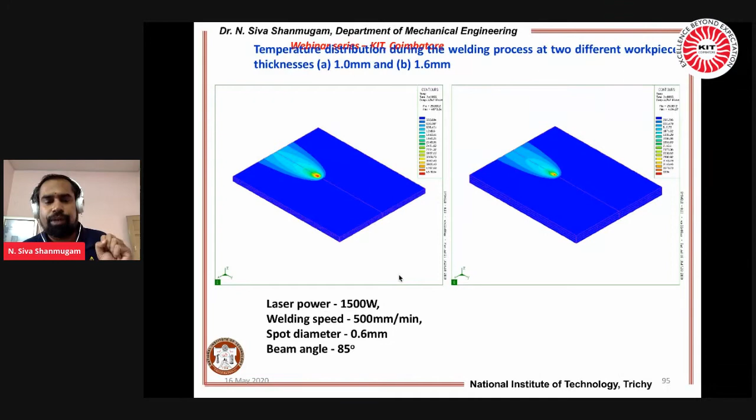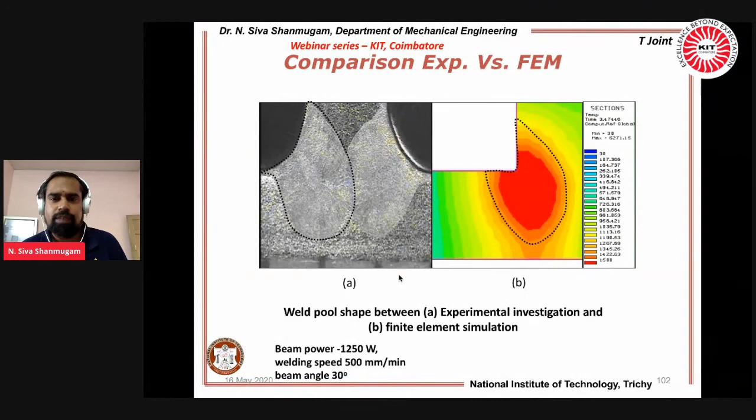So this is a comparison between the experimental part and the simulation part, for the T-joint. And you can take only the elliptical profile. I already told you about the Gaussian, three-dimensional conical Gaussian, how the temperature distribution on the top surface and also the directions. If you want to take only the molten pool once it is crossing more than 1500.

You see, 1773, something like 1500 plus 273 Kelvin. Sorry, I mentioned 173 earlier, it should be 273. If you add, this is the molten profile. Above the profile, what is the area below the curve? What is the area which crossed the melting profile? That area only I have captured and showcased in this picture. So like that, once you simulate all those things, extraction of information is up to you.

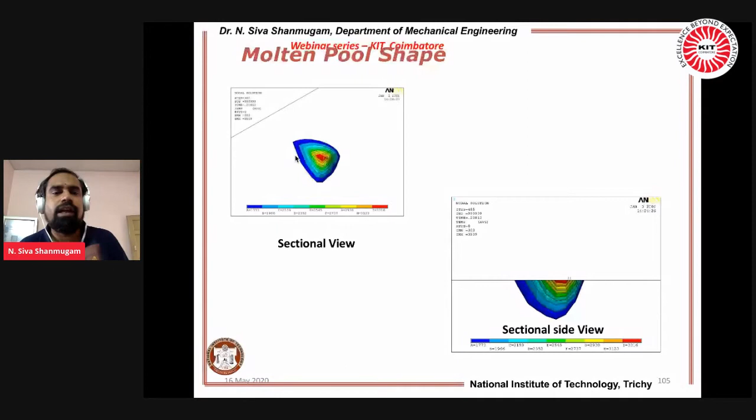What you want, how to showcase your results, you can get the beauty of the informations. So these are all you can do with the simulations. Only you can move the molten profile.

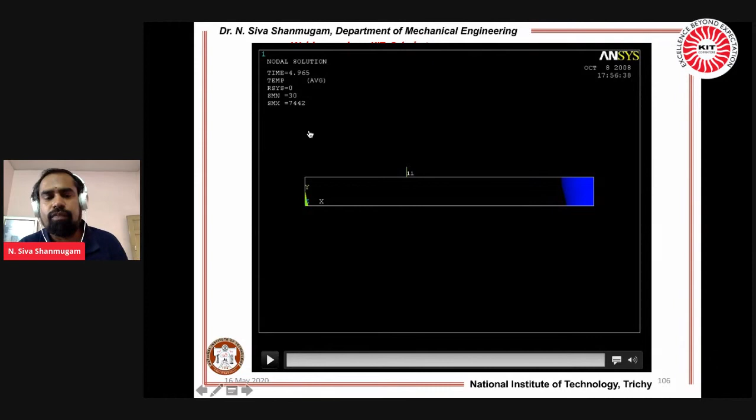The two animations that I showcased are of the full entire temperature. This one is only of the molten pool that crossed beyond the melting profile, that is the melting point. And for the keyhole, it is about the vaporization stage, the area when the laser is moving from one end to the other. The area obtained above the vaporization stage, that also you can simulate.

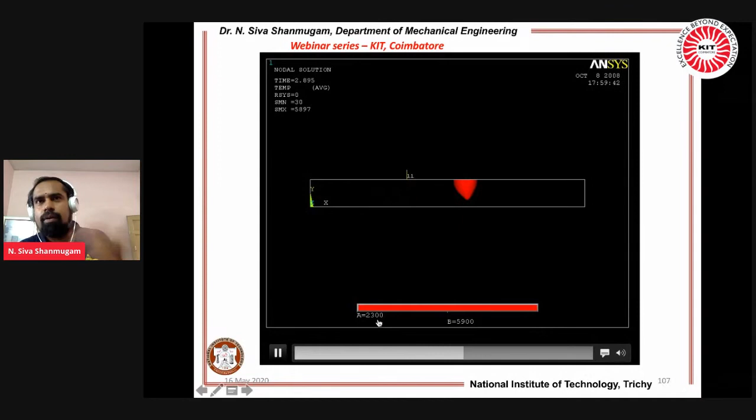You see, it is something around 2300, so it is something around 2000. About 2000, what is the profile? That is pertaining to the keyhole.

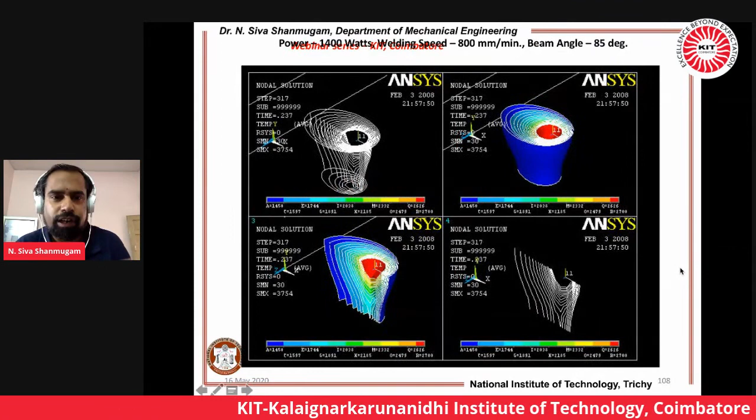Like that, you take different frames of different plots and you can highlight them on your screen. This is one paper, I forgot the name of the author, where they used a laser impinging on GG17 glass and used a high-speed camera to capture only the keyhole.

So I have used the same thing. I compared the simulated results with the previously published literature. I took the properties of GG17 glass, that is arsenic glass, which has an affinity for laser beams, and I taught those properties to my code. I used the same conical Gaussian and simulated the conditions of laser impinging on GG17 glass, and compared it with the previously published article for different welding speeds and different beam powers.

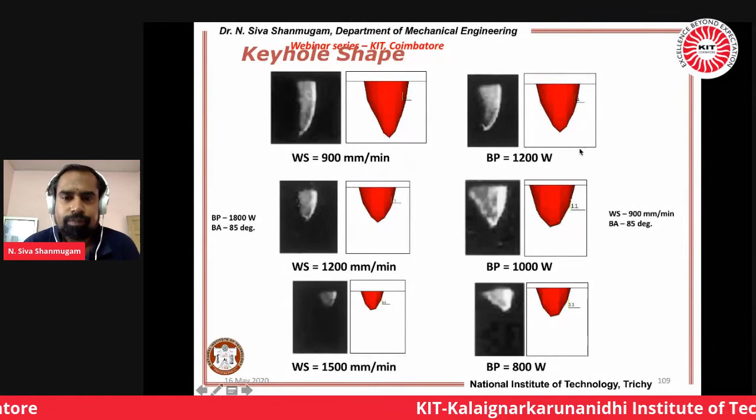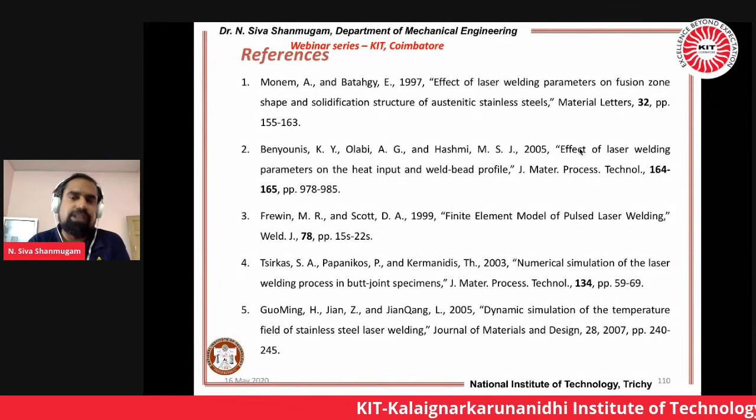With these references, it was highly difficult to prepare my presentation. So at this juncture, I thank all the researchers who published these articles. Without that, it would have been highly difficult to prepare and give this presentation through this webinar.